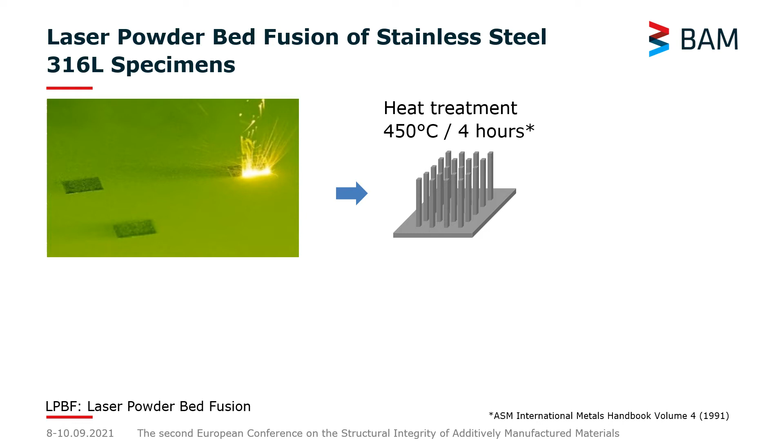Now, unfortunately, once we started cutting different shapes or extracting different geometries from the generic as-built shape, we faced distortion. The residual stresses that were still remaining on our part were so high that the material started bending.

And now we have to ask ourselves, although we applied a heat treatment, what are the remaining residual stresses, especially when manufacturing different shapes or cylindrical shapes from this starting block where we don't see any distortion? What are the residual stresses remaining in this part?

And also, what other post-weld heat treatments can be applied to laser powder bed fusion? So what do we know from welded austenitic steels with respect to stress relieving heat treatments that we can read across to the laser powder bed fused parts, having in mind that they have completely different microstructures?

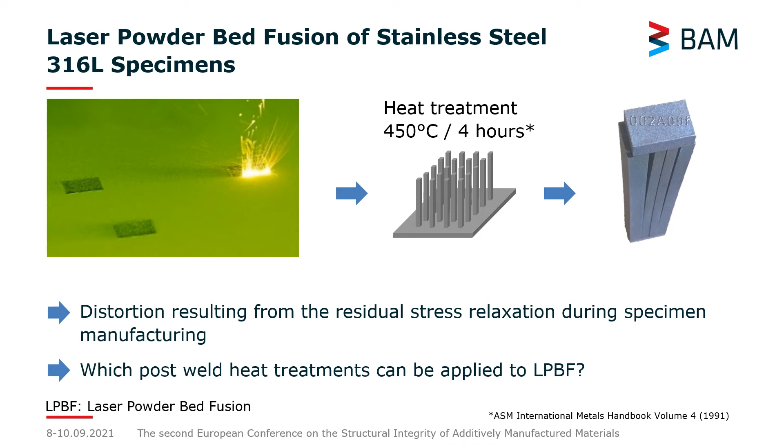This brings me to the aims of the investigation. We will determine the residual stresses in final specimen geometries. By final specimen geometry, I mean a specimen that was extracted from this generic as-built shape, so for instance, tensile samples.

And we will focus on the residual stress range, so we'll look at the delta between the maximum and minimum residual stress in that specific geometry.

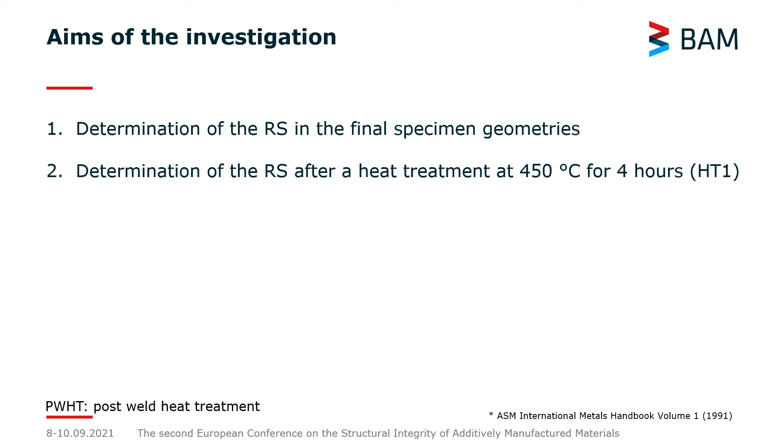Then we will focus on the residual stress distribution after the first heat treatment at 450 degrees for 4 hours in the SENB geometry, with the aim to further look into how the residual stress relaxed when you apply an additional heat treatment at 800 degrees and 900 degrees for 1 hour.

Why are we interested in these temperatures? In fact, we know from post-weld heat treatment of austenitic steels that when we apply 840 to 900 degrees for 1 hour per inch of thickness, we can obtain an 85% relaxation.

However, we also know that welded austenitic steels, from a point of microstructure, in how the residual stresses are distributed, is very much different to the laser powder bed fused material. We aim at understanding whether this kind of heat treatment can be applied to our laser powder bed fused material.

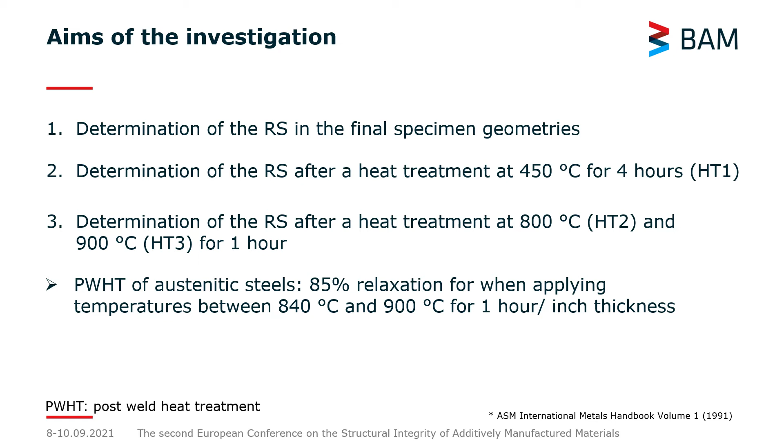We manufactured our specimens on an SLM Solutions 280HL LPBF machine using gas atomized spherical stainless steel 316L powder. You can see the composition in weight percent here.

A meander stripe scanning strategy was applied, thereby the scanning vectors were aligned with the geometry. Also, we applied a rotation by 90 degrees between each subsequent layer.

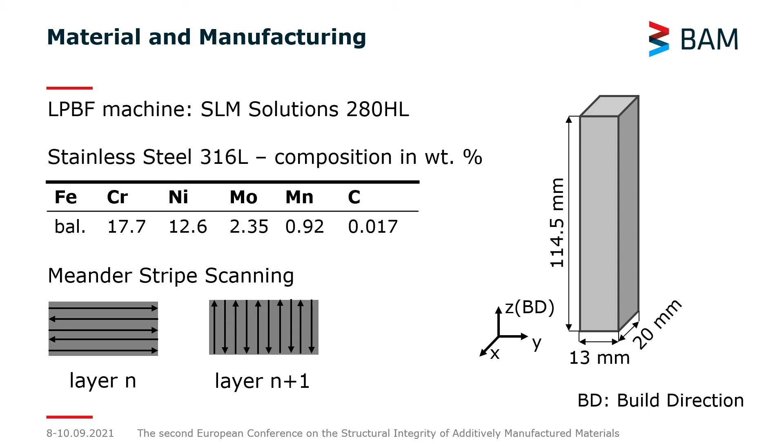In this study, we're interested in determining the triaxial residual stresses in the bulk of our specimens in a non-destructive manner. We do so by using neutron diffraction.

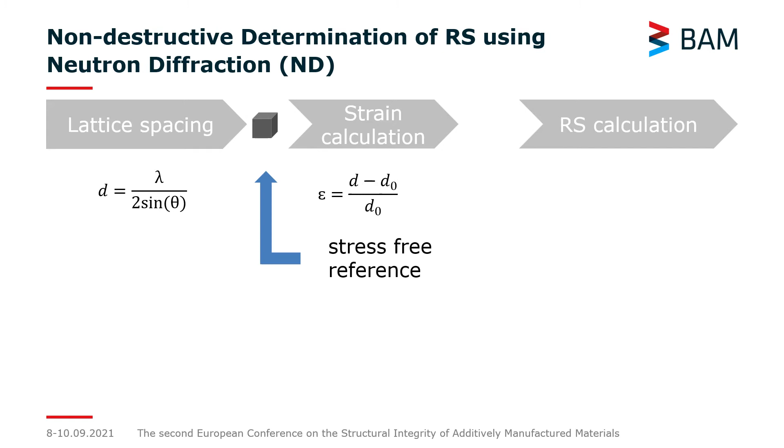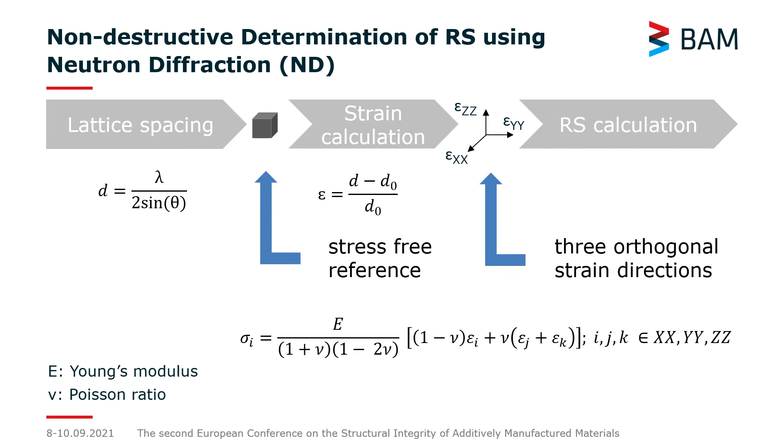In fact, we use the lattice spacing as an atomic strain gauge. We can determine our lattice spacing using Bragg's law, which connects the lattice spacing to the wavelength of an incoming radiation. If we then have a suitable stress-free reference, we can calculate our strain, and then if we do so in 3 orthogonal directions, we can calculate our triaxial residual stresses using Hooke's law.

Now, how does it look during a neutron diffraction experiment? We use a set of slits and collimators to define our gauge volume. Thereby, we will determine the strain along the scattering vector, which is the bisectant between the incident beam and the diffracted beam. If we zoom in, the gauge volume used for this study was 2 by 2 by 2 millimeters.

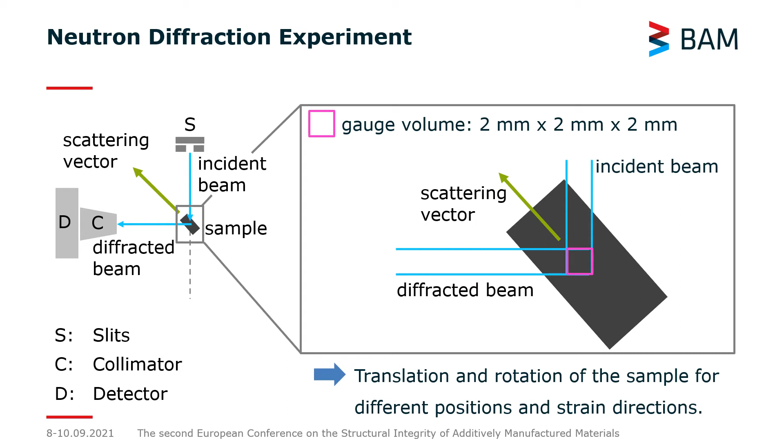You see our gauge volume inside of the specimen with the direction of the scattering vector. And what it basically means, thinking back about the methodology of neutron diffraction, is that we do have to translate and rotate our sample so that we acquire the stresses in different positions.

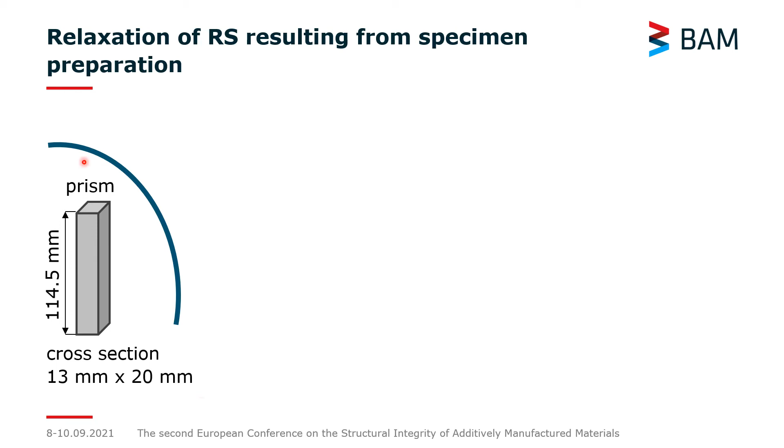Starting with the relaxation of residual stresses resulting from specimen preparation, we are looking at how, when extracting different geometries from this as-built prism, the residual stress ranges change.

So we start off with a tower geometry, which is a geometry that is subsequently used to machine tensile samples. We keep a constant cross-section, but we reduce the height. What does it mean for our residual stress ranges?

Again, the stress range is the delta between the maximum tensile residual stress and maximum compressive residual stress. We see that our stresses in the build direction remain fairly constant, whereas the other stress directions are relaxed. So despite the fact that we reduce the height by 35%, we only see a very small effect on the build direction.

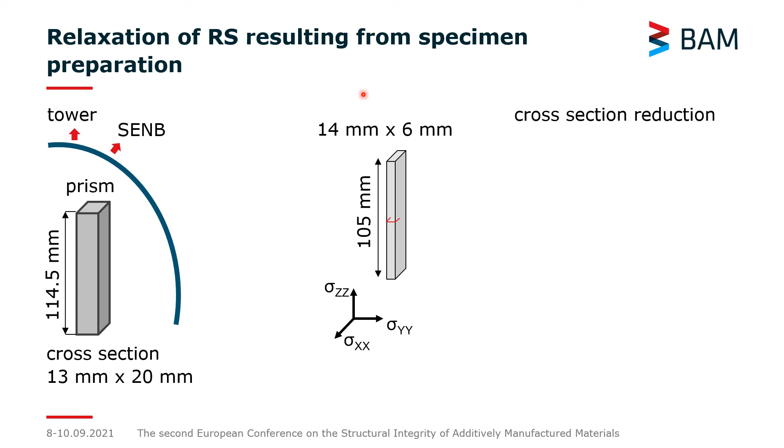Now, moving to another geometry, the SENB geometry, which has a shape where we reduce the cross-section but maintain almost the same height. The stresses in this geometry are reduced from 800 megapascal down to a maximum of 400 megapascal. So by reducing the cross-section by roughly 55%, we have a relaxation of up to 50% in the build direction.

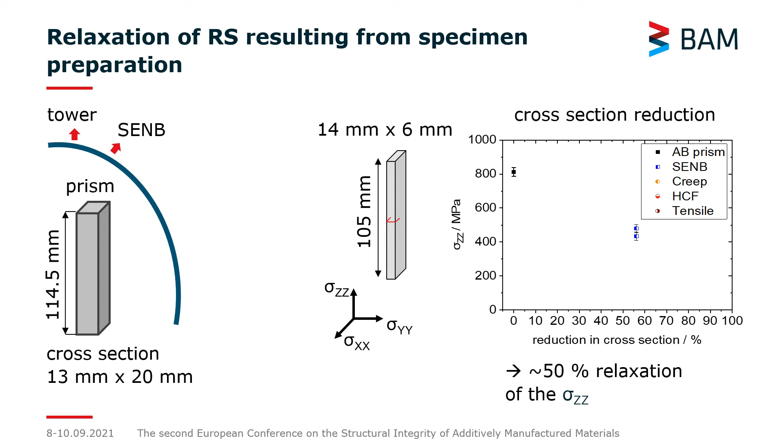I have to note here that these SENB specimens were heat treated before the actual manufacturing of this SENB geometry was performed, but we'll come to the effect of the heat treatment in a later stage. The other geometries we looked at were cylindrical.

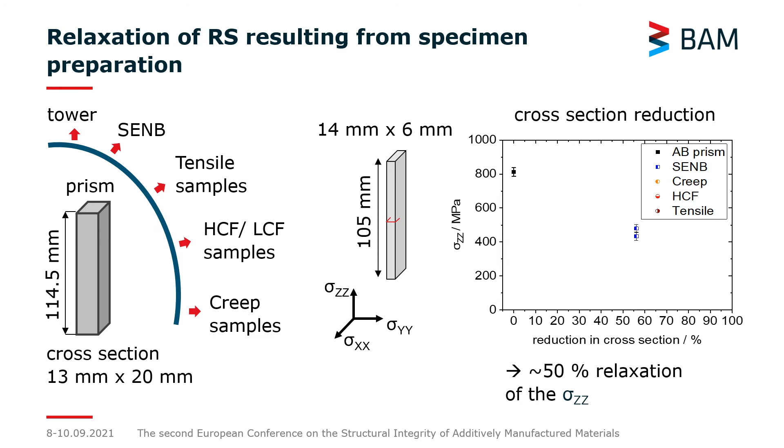So from the as-built prisms, we extracted high cycle fatigue or low cycle fatigue specimens, creep specimens and tensile specimens, which had different heights, as you can see, and also the diameter changed.

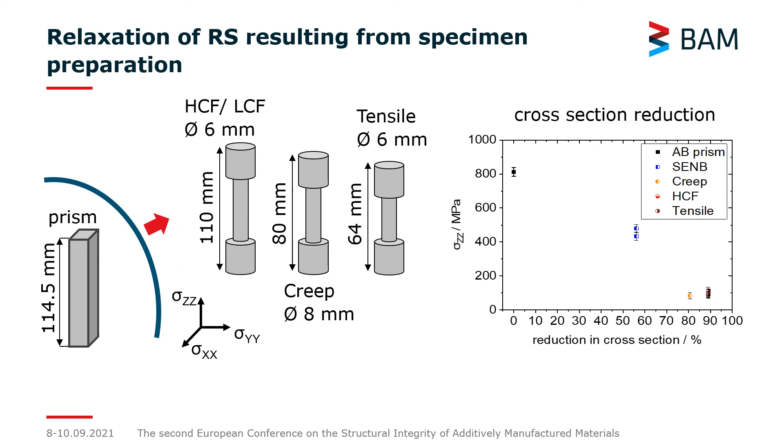And what we've observed is that when determining the residual stresses in the gauge section, so we have a heavy cross-section reduction compared to the prism, we see that independently of the height, the residual stresses are heavily reduced when compared to the as-built prism. So there's a very large effect on the stresses in the build direction. This also holds true for the other directions, if we go from a larger specimen to a cylindrical specimen.

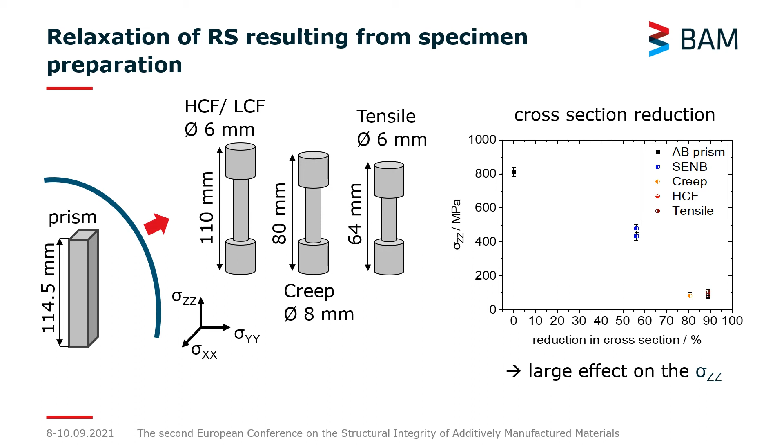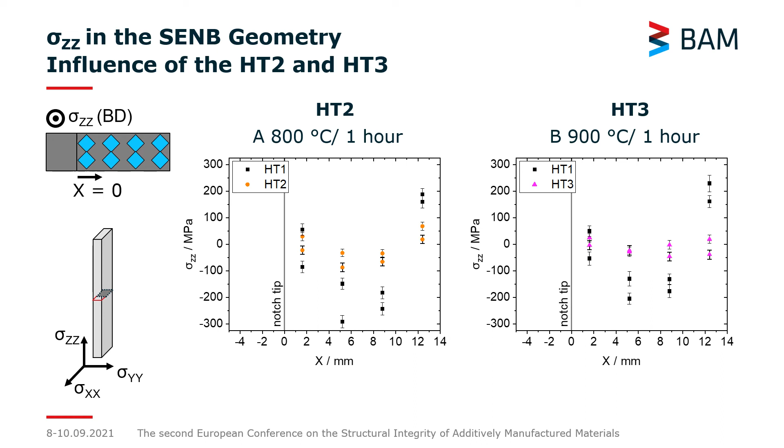We still see that there's a profile in the residual stresses along the remaining ligaments in our specimen. And if we apply 900 degrees, this gradient is almost not visible. So there are two things to note: the reduction in the magnitudes and a flat profile when applying 900 degrees.

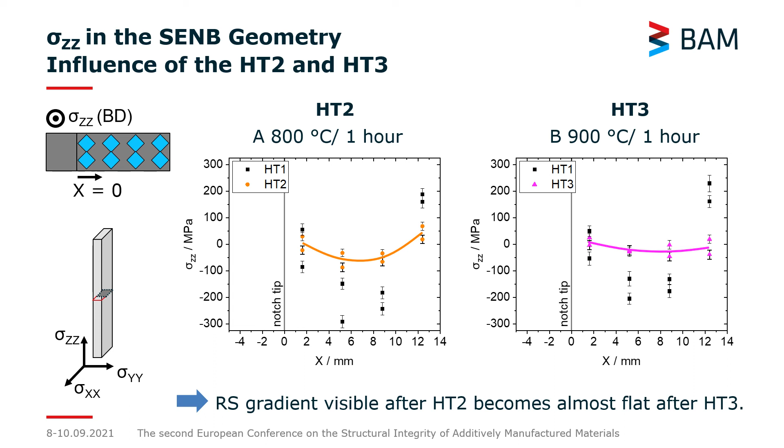And in fact, when we think about macroscopic residual stresses that need to balance by definition over the component scale, a flat gradient is in essence an indication for almost fully relaxed residual stresses.

Now we would like to compare our relaxation results with other findings in the literature, and we can do this by using the Larson-Miller equation. So we want to plot the relaxation versus the thermal effect, which takes into account the temperature in Kelvin, the time in hours, as well as a material constant for stainless steels, which is between 20 and 22.

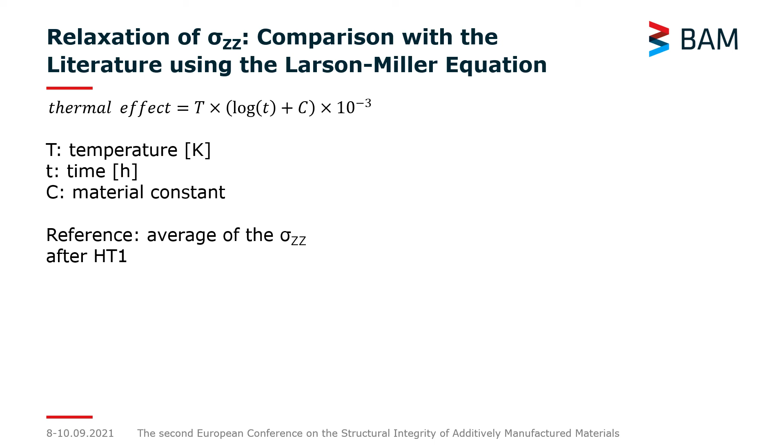For the plot that will follow, we use the stresses in the build direction after the first heat treatment. And what we see is that our results, so 900 degrees and 800 degrees applied for 1 hour, fit a nice trend which ends in a plateau once we reach a thermal effect of about 24, which corresponds to a relaxation between 85 and 90%. And this actually corresponds well with what is suggested for welded austenitic steels.

So basically, when applying heat treatments between 840 and 900 degrees for 1 hour, we have a stress reduction of 85%, which in this case applies to the heat treatment at 900 degrees for 1 hour that was applied to the laser powder bed fused 316L.

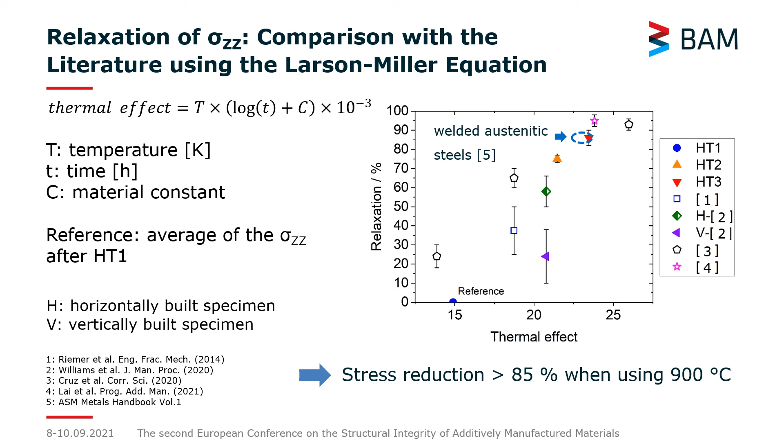Now, to summarize and conclude, we determined the residual stresses non-destructively using neutron diffraction in the laser powder bed fused 316L specimens. We looked at the mechanical relaxation starting from the as-built prism to the final testing geometry.

Thereby we observed that when we keep a constant cross-section but reduce the height of the specimen, we have a very little effect on the residual stresses in the build direction. If we reduce the cross-section, especially if we go towards cylindrical specimens, there's a very strong relaxation of the residual stress in the build direction.

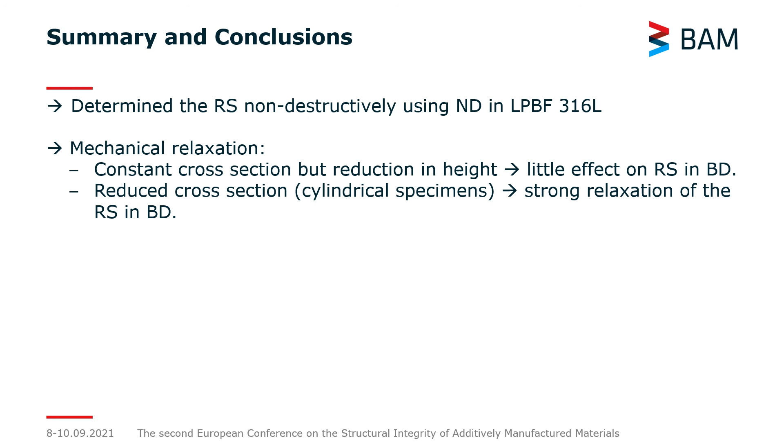In the SENB geometry, we've observed that we have tensile residual stresses closer to the surface that are balanced with compressive residual stresses in the bulk. This is the way the residual stresses distribute in laser powder bed fused specimens.

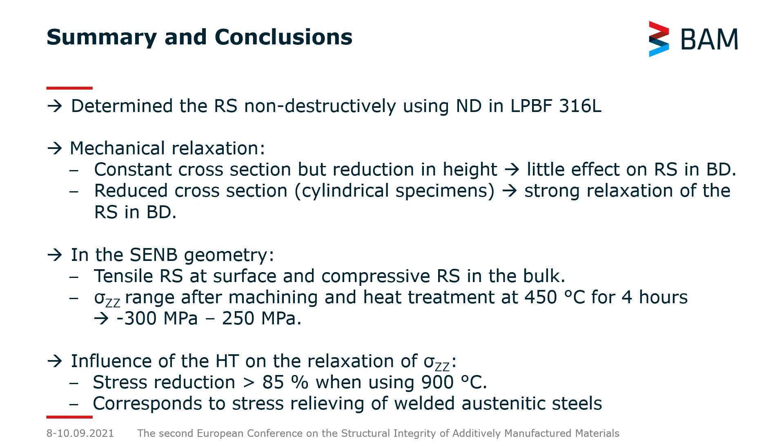And we've seen that although these SENB geometries were heavily machined and had been heat treated at 450 degrees for 4 hours, there's still compressive stresses of up to minus 300 megapascal that are balanced with tensile residual stresses of 250 megapascal. By applying additional heat treatments, we've seen that a stress reduction of about 85% can be obtained when using 900 degrees, which corresponds well to stress relieving suggestions for welded austenitic steels.